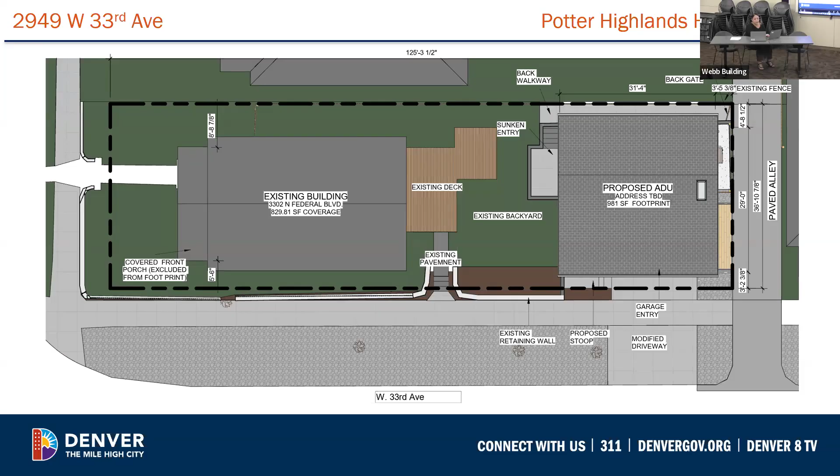You can see the south elevation facing on West 33rd Avenue with the main ADU entrance on the left. The structure will be clad in a blonde modular brick at the first floor with a 5-inch shake shingle siding at the second floor and a metal C-channel between the first and second floor for banding. The materials match those found on the primary structure, and materials like this are commonly seen in the district, meeting design guideline 4.20. And then windows at this elevation are just simple 1/1 double hung windows with proportions that match the district. Next slide.

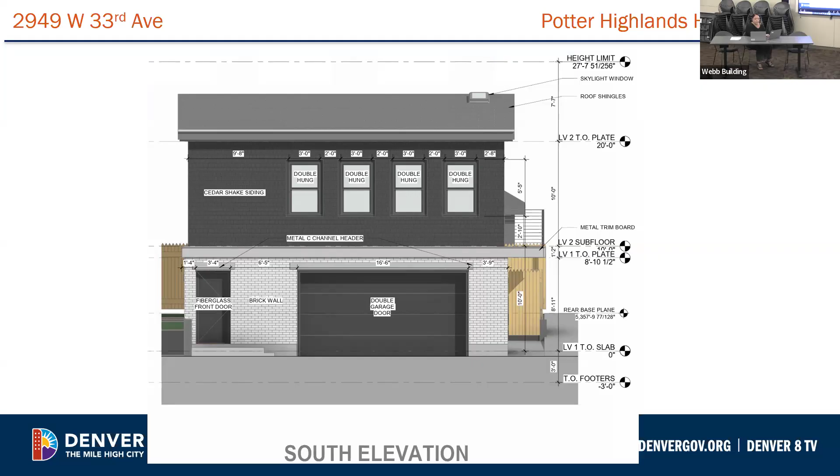So here you can see the west elevation facing towards the rear of the primary structure. As you can see, the grade does change from the street. At the first floor, you can see these two doors. One entrance is to the garage and the other is to the home gym. At the second floor, you can see more atypical clerestory windows mimicking the asymmetrical roof line, which is more visible in this facade. Next slide.

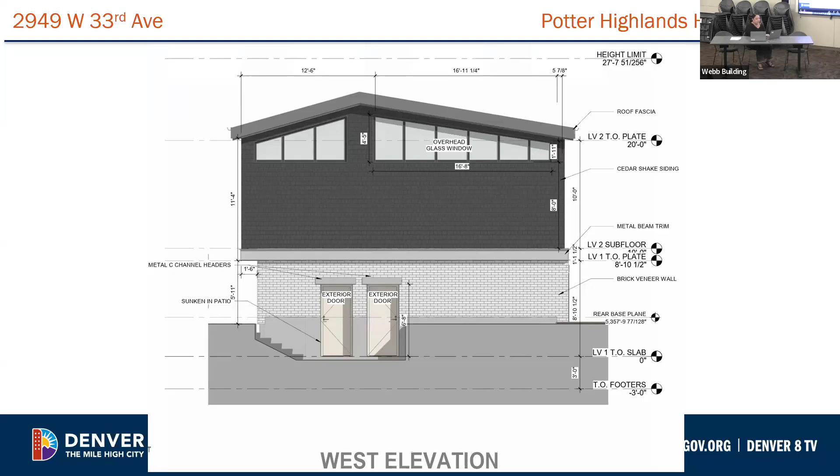Here's the north side interior elevation. This entire elevation will be clad in that 5-inch shake shingle with that metal C-channel trim showing the separation between the first and second floor. At the first floor are casement windows for the gym. At the second floor, simple 1/1 double hungs again that match windows at the alley and West 33rd elevations. Next slide.

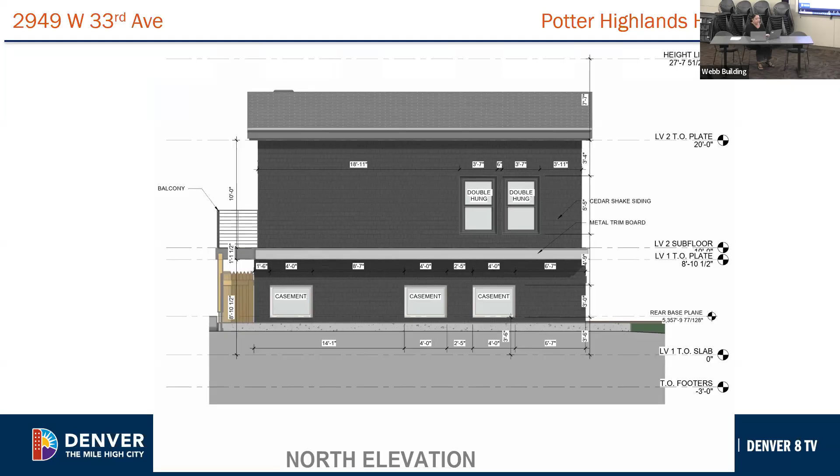And then here's the east elevation that's facing towards the alley. Here again is that blonde brick at the first floor and the shake shingle cladding at the second floor and double hung windows, as well as a small balcony with a horizontal metal rail. Here again, you can see that asymmetrical roof line as well. The garage ADU is compatible and subordinate with the primary structure in terms of height, mass, and form, though the roof shape is not found on other accessory structures in the surrounding context, but mostly meets design guideline 4.19. Next slide.

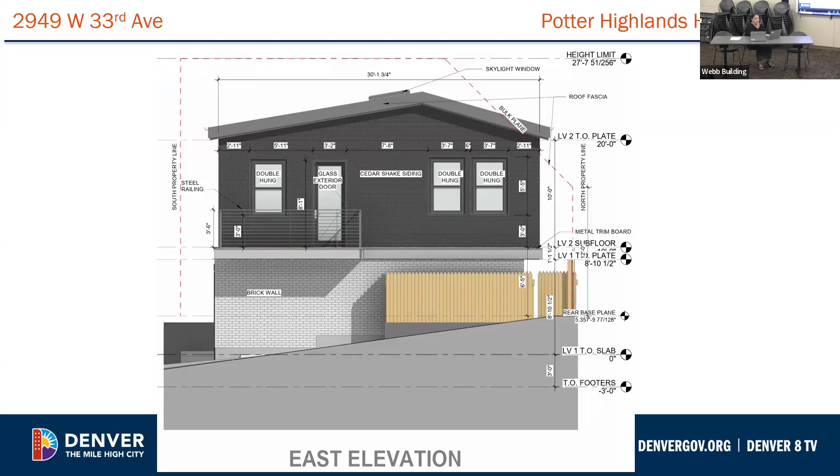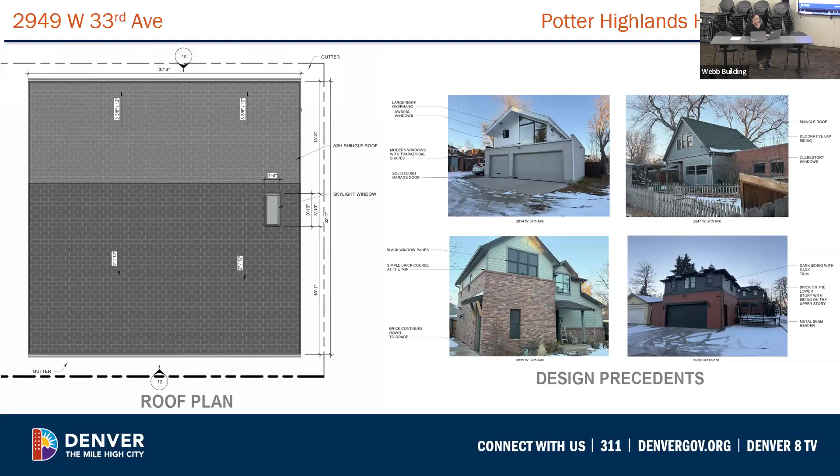And then here's the proposed roof plan for the new structure on the left. The applicants have proposed an asymmetrical roof form that's not commonly found in the district and does not relate to the surrounding historic context or to the primary structure on the lot. On the right here, you can see some of the newer ADU design precedents they've included in their application. However, as you can see, none of these have an asymmetrical roof form. Next slide.

The Denver zoning code states that the commission must find that development conforming to the requirements of the code would have an adverse impact upon the historic character of the district or the historic structure. Landmark staff is not supportive of the requested administrative adjustment for the bulk plane encroachment for the roof, as the overall design of the roof has remained asymmetrical and does not match roof styles typically found in the historic district. This garage ADU roof design does not match typical garage ADU structures that are found in the district, so meeting the requirements of the code would not have an adverse impact on the historic district in this case.

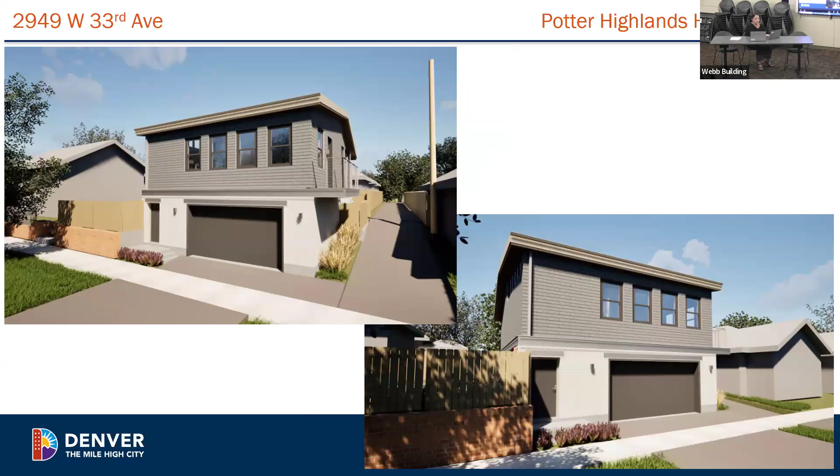Thank you, Crystal. Commissioners, do you have any questions for staff? I did have one question as far as in considering how this ADU fits into the surrounding context. It sounds like you're looking mostly at the primary structure, which I know is what we typically do, but because of this placement on the street and we have neighboring actual primary houses right next door, do you have a sense of how this ADU fits within the height and the setback? It looks like height and setback wise, mass and overall form does appear to fit.

It was really just the roof form, which I think if this was a primary structure, we might not be comfortable still recommending approval. But because it is a detached accessory structure that is of its time, we thought maybe the roof form would be okay because all the other guidelines have been met. But we wouldn't necessarily support an administrative adjustment for it. But it does seem to fit overall. All right, thank you, Crystal.

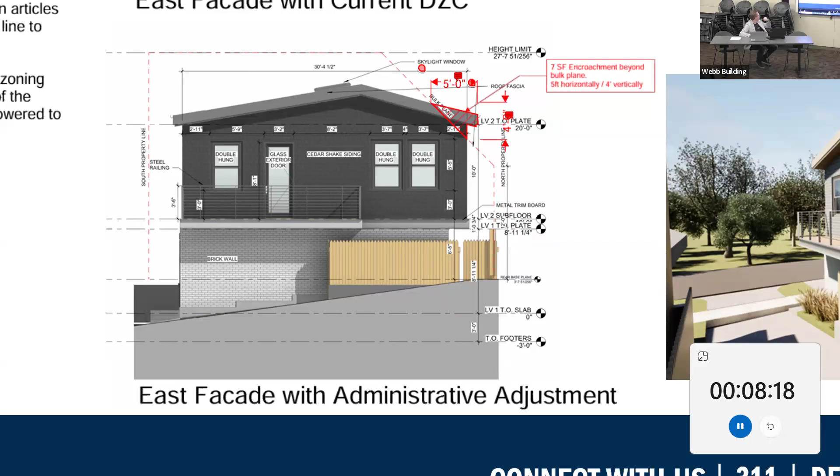And so we went back to the drawing board. I don't know if you could zoom out a little bit on that one. So we went back to this, and we had to make that slope because of the bulk plane, and it made for a kind of undesirable interior condition that was maybe like 5 feet or so high. That's where the bedrooms are. So it wasn't ideal, but it did work.

And so we went with that first, and then I think Crystal came up with the idea that we could actually make these the same height, which the client loved. And so we brought the roofs up to the same height, and that really made those bedrooms a lot better on that north side. But the part that we diverged a little bit on opinions was if we took this, it made it centered. And it seemed like a fairly easy thing to do.

We can do it if we need to, but the interior walls are right here and then right here. This is where the garage is, and we need that at least 20 feet to fit a parked car there. And then this is where the bedroom walls are. So everything stacks, and the center of the roof stacks on top of that. If we move it over, like I said, we can do it, but it'll either have a beam here, and then maybe have a beam in the garage space here, which will then interject with the stairs on the other side. I don't know if we could see a floor plan, if that's possible.

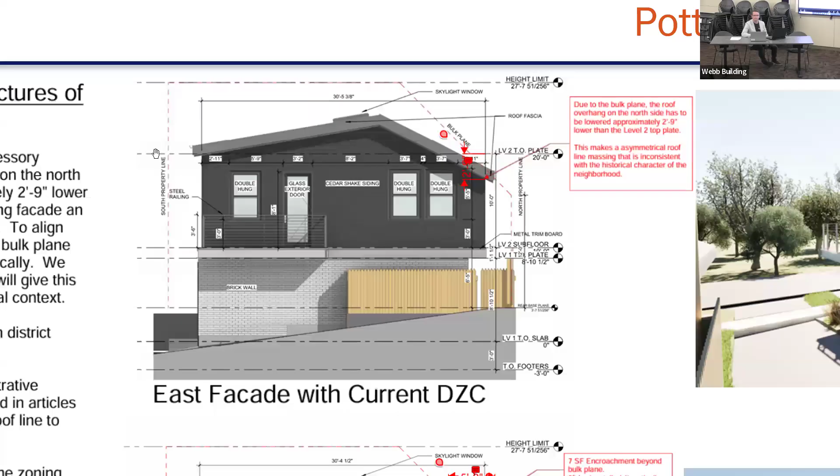And to better understand the comment you made about the asymmetrical roof, the peak of the roof, you didn't submit reflected ceiling plans, or at least they weren't in our packet. So I'm curious, are you proposing that the roof or ceiling area in the kitchen and living room are exposed and you're seeing that peak, or are there drop ceilings in any of the areas? Yeah, everything's vaulted in this one. And in the bedrooms and the bathroom as well?

The bathroom, no, but the bedrooms, yes. The closets are capped off too. Yeah. We actually plan to put a little mechanical room where that closet space is, maybe up there, because there is some added height. Since we changed the roof, we really could take advantage of a little bit of extra attic space there.

And the bathroom would look really weird if it had 10 or 11-foot ceilings, so we capped that off at 8. But everything else, like the bedroom and living room, they're all vaulted. That should make the space feel a lot bigger, even though it is a small area. Any other questions?

All right, I just thought, and maybe this is for Crystal too, today we're voting on whether it's approved through Landmark, but getting the recommendation of Landmark when we go for an administrative adjustment makes things a lot easier. I know, because I've done this on another project and it got through in one day. So getting your approval is really important to me. So if we have to change it, even if we get approved today, I just want to follow up with you and figure that out.

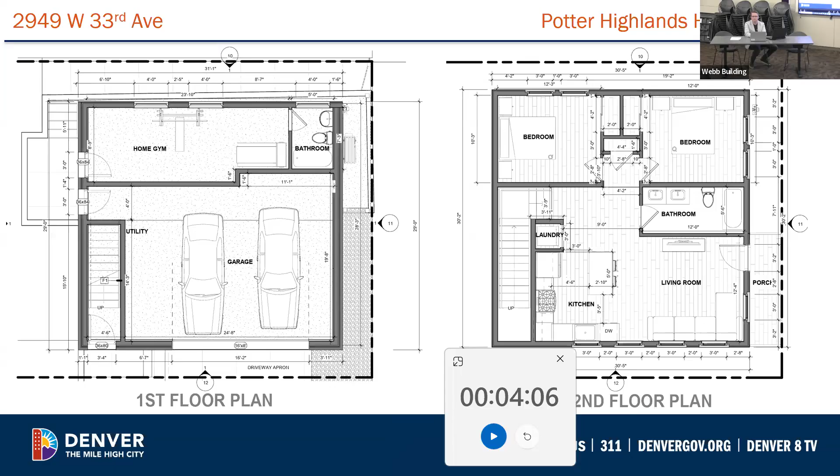I guess that brings up a question I have for you: would you prefer to get the administrative adjustment from us, which my understanding is would save you the time of going to the BOA for a separate process, if that meant making the roof symmetrical, which we'd have to deliberate on, versus holding on to the asymmetrical roof and pursuing the BOA process? Is that something we can take into consideration in our deliberation?

I know my client said they wanted to see if it would be allowed. I told them roughly what it might cost to put the beams in, and they said, let's try for that first. But it comes down to timing too, it can take a while to get through the BOA, so I think I need to discuss it with them. I know you can approve with conditions, so maybe, I don't know the best way, I'm just trying to brainstorm with you.

Besides sawtooth, did you consider any other roof forms? So this is our third roof form for this project, with different angles. Yeah, there were a couple more in concept, but my client gravitated towards the sawtooth first, and then we modified it.

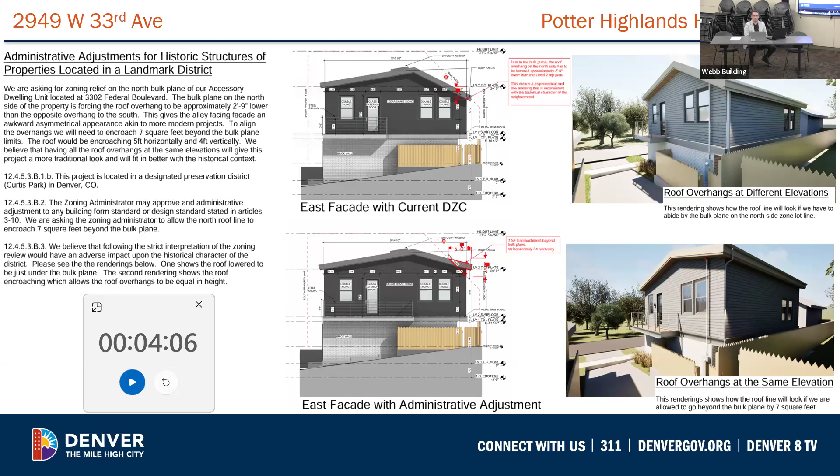I think we... Thank you. Thank you.

All right, staff, do you have any recap or clarifications? I just want to clarify, you're voting on this design, this is what they presented, and they're asking for an administrative adjustment for that bulk plane encroachment. And just to be clear, you have to find that they have to do that, because conforming to the requirements of the zoning code would have an adverse impact on the district or the historic structure on the lot, and you have to find that to give them that administrative adjustment.

If you don't think that, you shouldn't support the administrative adjustment, just to be clear. But you can approve the design as is, and they can pursue other options, or they can change it. In which case, it would likely have to come back, but if it's a simple roof change, it could likely be on consent, so.

All right, thank you. Okay, I think we're ready to move into deliberation. What are your thoughts, commissioners? So I'll jump in, because I asked that question, but my first thought is that I'm hesitant about the asymmetrical roof as designed, even just approving it, regardless of the question of the administrative adjustment, because it's facing 33rd and there is the alley there, and you would see from 33rd, across the alley from that ADU, I think pretty clearly that condition of asymmetry.

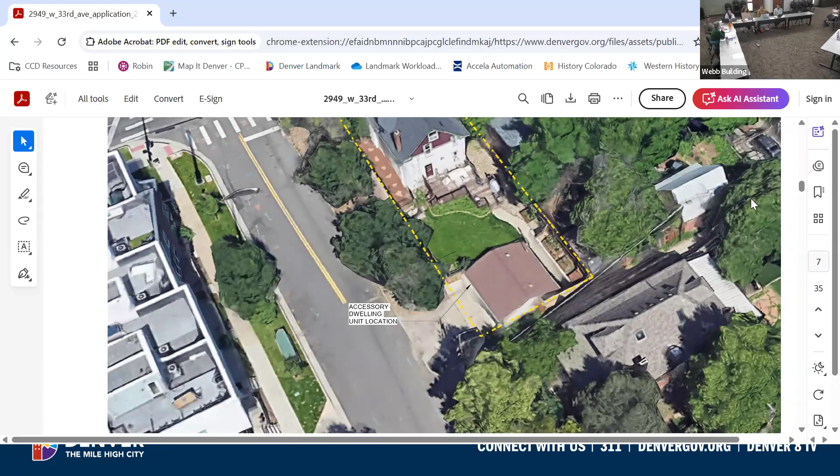Yeah, I think if they do the symmetrical, they'll probably hit the bulk plane regardless, right? So I'm sure they're gonna have an administrative adjustment at some point if we recommend a symmetrical roof configuration. But a wider consideration of options might help instead of trying to force that engineering in. Again, friendly comment. Because then, if it was a more traditional roof line, the administrative adjustment would be more straightforward.

Well, I guess in the interest of making sure we're moving forward, it sounds to me like it's possible that what we're actually getting at is a denial at this point, and asking the applicant to reconsider the roof entirely and see how that might better fit with design guidelines. However, if someone has a different motion that they'd like to make, we can certainly do that.

I would have. I probably would have been pretty close to approving with the administrative. So I don't know if that really makes any difference if we go and it doesn't pass, or we go denial and vote that way. I don't know what difference that would make one way or the other.

Yeah, I mean, I guess the issue is that we're at quorum. Yeah. And if we don't have a motion that can be approved by all of us, then basically they have to come back either with this application or with a different one. It doesn't really matter either way then. Yeah, I guess not. But I think we might need to do both motions. It depends on if we don't have a vote.

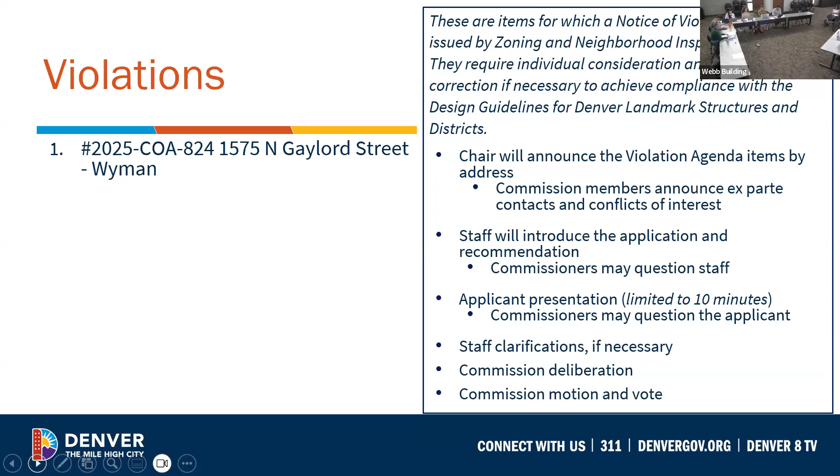All right, we now have the violation section of our agenda, with one project. This is application 2025-COA-824 at 1575 North Gaylord Street. These are items for which a notice of violation has been issued by zoning and neighborhood inspection services. Now that I've introduced this project, we'll hear from staff and then ask questions. Go ahead. Amy Amadon, representing Landmark staff. And we have Michelle Campbell, the applicant, here with us today.

So in 2022, the landmark inspector had reason to come to the site based on a complaint that there was some work occurring at the rear of the property, I believe some fencing under construction. My understanding is that at that time, 2022, Michelle was a new owner of the property. As I mentioned, this house was built in 1910. Decades ago, it was converted to a multifamily property.

And the landmark inspector found some fence construction underway, a notice of violation was issued, staff issued a certificate of appropriateness and a permit was pulled and Michelle legalized that fence construction. So everything was settled in 2022. At the time, from what I can see, the landmark inspector also thought perhaps there was a window violation, but nothing was resolved at that time.

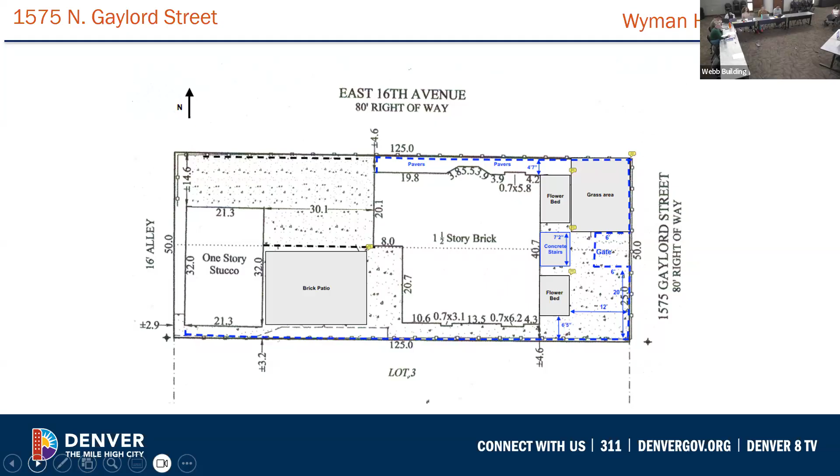So as you see in this site plan, I'll refer to this again in a moment, but I do want to call to your attention that there's quite a bit of hardscape here, that indication of concrete and a little bit of softscape in the front with some flower beds and grass. Next slide, please. So I know this is a bit of a fuzzy image, it's just a screenshot out of Michelle's application packet, but what I want you to see here, she's got some dimension lines indicated. It looks like the fence in the front of the property is about 48 inches, which is allowed. But it quickly at the side jumps to something taller.

And the design guidelines call for fencing to stay at that 48-inch height until you get to the front facade of the building, and then it can jump to 6 feet. So there's a concern with the guidelines that the height increase is too quick there, and you would have to find that that was acceptable in order to allow that fencing to stay. So that's just one thing I want to call to your attention as a potential conflict with the guidelines.

You'll also see in this picture, and you'll see it more clearly in another image, I guess go to the next slide, that there's an arbor in the front that is definitely over the height allowance for fencing in the front yard. Another thing to look at here is the amount of hardscape that has occurred in front of the property.

Sorry, I need to open a note here. ...myself out of my computer.

Okay, so the two aspects of the guidelines that we're finding in particular are not met have to do with the walkway and hardscape and the fencing. So initially I showed you a picture of the property in 2019. At that time, the walkway leading to the house was flush with the lawn. There were a couple of steps that led you over the little grade rise in the front, and then a sidewalk that led to the porch, and then you rose up on a grand staircase to the entry to the house. That has now changed.

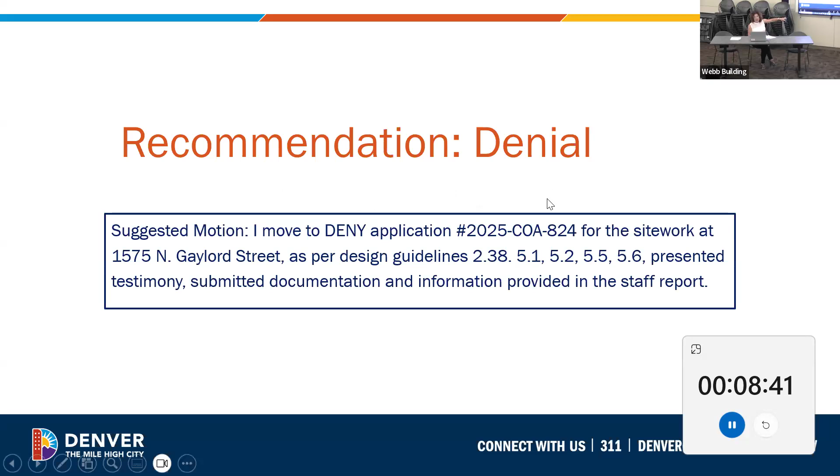That big set of hardscape in the front, I know we could go back to some of those other pictures, but that is used as a sidewalk area to get back to the rentals. If you look at the south side of the building, yeah, kind of there, you can see it a little bit. As you go past that bench there, you have to go downstairs to get to the garden level units that are down there. And so a portion of that front hardscape really has to be sidewalk to be safe to walk through for the tenants, so that you can shovel and keep it clean and everything like that.

So I think there's a portion in front of that where that little patio table was. I mean, something could be done there, I guess. I do not think it could be grass. I don't know how you would keep that grass alive. We don't have any sprinkler system or anything. The beautiful grass that you see on the northeast corner is actually turf that I put in because the tenants' dogs had completely killed that grass. So I put in a really high quality turf to keep it green and beautiful and have a place for the dogs to go. But I can't keep grass alive there. So if you wanna talk about other options for that hardscape to make it prettier, I'm open to things, but I don't think grass will make sense.

As far as the fence goes, if we go to the presentation I put in, when I had my first discussions with Amy a year ago, she did mention the cheapest option is you can take down the fence because you don't need a fence. And I really think, looking at this first slide, this building is 1 block north of Colfax and 1 block west of York. It's not in a great area. There's a synagogue across the street that has a food kitchen every Wednesday. We have homeless encampments regularly in the area.

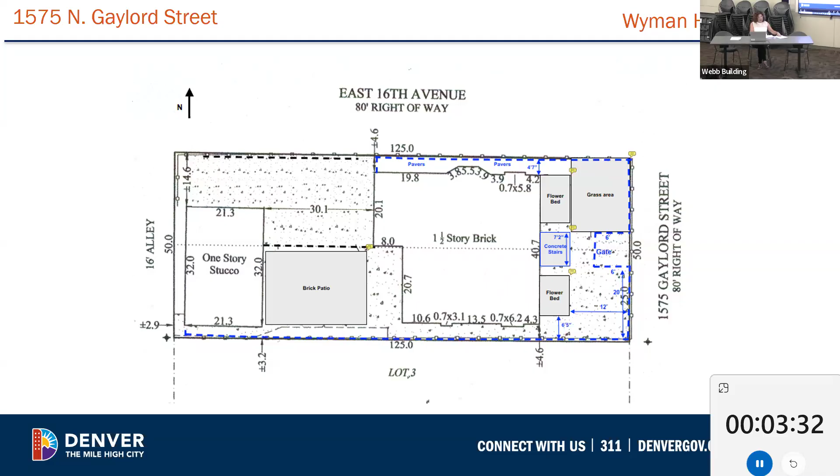On the south side where the fence is a little tall in the front, that's because the neighbor's property goes like this and the fence is built on theirs. So I think she was trying to back one side. Yeah, it gets to be 4 feet further on. I think she was trying to just layer it up. I don't have a strong opinion about that either, except that there are a lot of big trucks that park on the other side of that fence. You can see in one of the pictures I provided a bunch of big trucks parked there. There's a current day picture of the south side of the house. I don't have that in the PowerPoint, but it's in the PowerPoint that Amy showed. That's all I have. That's the end of my presentation.

Thank you. Commissioners, do you have any questions for the applicant? I just want one clarification. So when you bought the property, the fence was already up? Yes, in its entirety, except for the backyard where I did work on the fence. And I did put in a second door that matches the doors in the front, and that was approved by Landmark at the time. It has the same construction with the black iron and the bar and the metal. So you added some additional fence in the back? Yes, to contain the entire yard, for safety and to allow another entrance in the back for people coming from the north side. Thank you. Any other questions for the applicant?

It might actually be for staff, but I think that is an important point. So Landmark did approve that work in the back with that construction material? No, it's a different fence material in the back. No, there's a wooden fence, but the door is the same construction material as the one in the front with the rebar and the black iron and the metal grating. It was built by the same person. So I used the person who had worked for the previous owner.

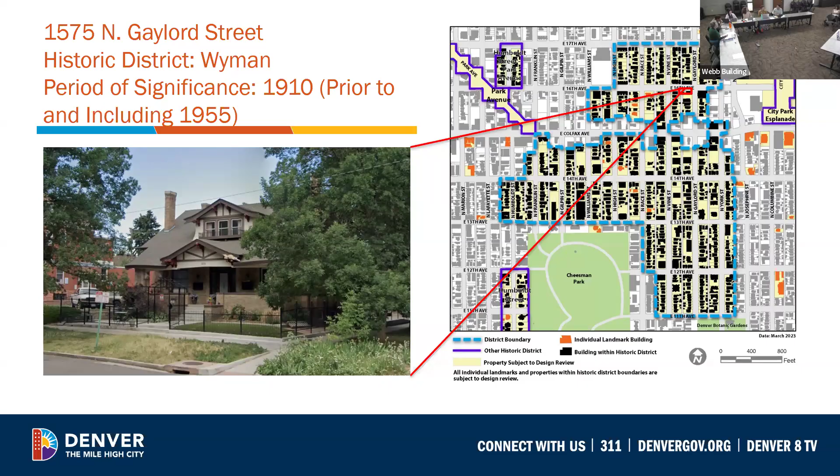So I think to your point, Chris, that'll get worked out in the conversation between the applicant and their landmark staff person. Right, I'm glad to hear Amy say that there's maybe a solution. That's all I really wanted to hear. I just didn't want to stick the homeowner with, hey, this doesn't follow the guidelines, you're gonna have to either completely redo it or tear it down. There's gotta be some kind of middle ground, I think.

I do think staff does work with homeowners. I think the homeowner in this instance wanted to see if this as installed could be approved by the commission. This could become a staff level approval if we could find something that was at the guidelines, and we all agreed on it. All right, would someone like to make a motion?

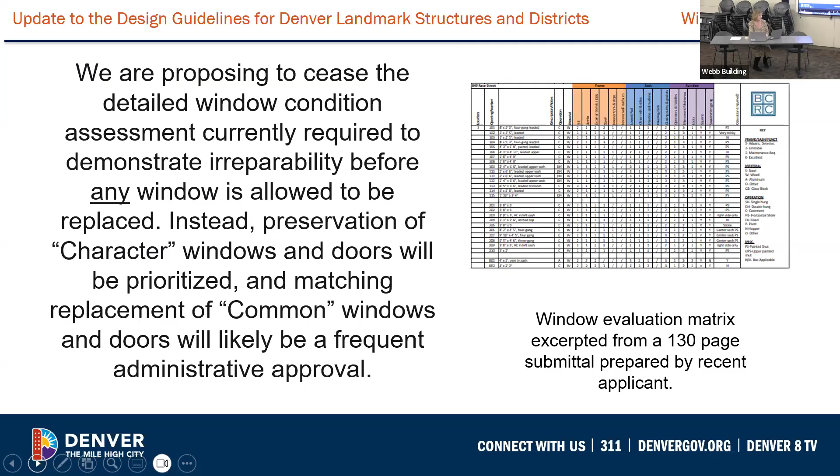Moving on to more of a design discussion. What about whether people can add new fenestration or infill or alter fenestration on a historic structure? So right now, I would say we don't really have very good guidelines for this. There's only one guideline that talks about this in terms of windows and one that talks about this in terms of doors. So I think designers probably feel it's pretty murky whether they can do this or not on the historic part of the structure.

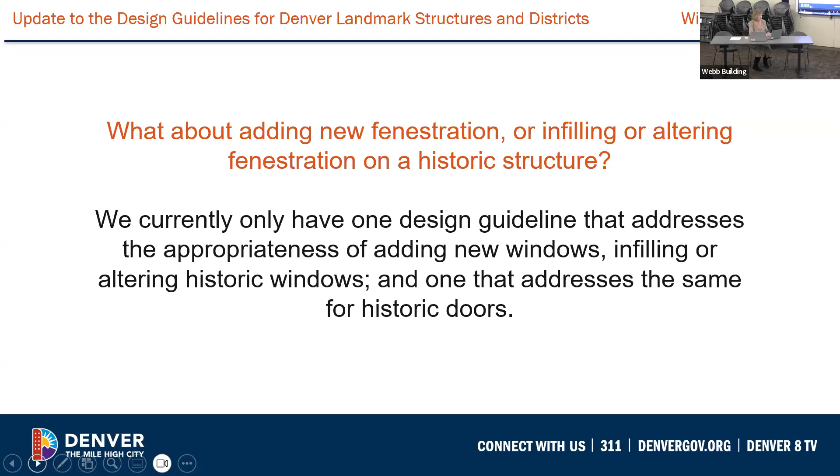So to improve that situation, the first thing we are doing is, sorry, I'm not even telling you when to advance the slide. Thank you for being

psychic. We are improving our definitions about visibility and public vantage points. Right now, we talk about caring the most about things that are on, what's the term we use, Brittany? Primary facades. And that is the street facing facade, which is pretty obvious what that means. Now we're gonna talk about public vantage points, which is defined here, and it means something broader. If someone's standing in front of a building, that might mean you're getting some views down the side. So it is expanding the area that you're going to be more restrictive about.

So that means, in your question of are we getting more strict? Yes, because you're gonna maybe be putting your foot down a little bit more about a broader view of the front of the building. You're also being more clear about what you care about. So as I go on to the next few guidelines, just keep in mind that we are adding some better definitions to where the hard line is for various policies.

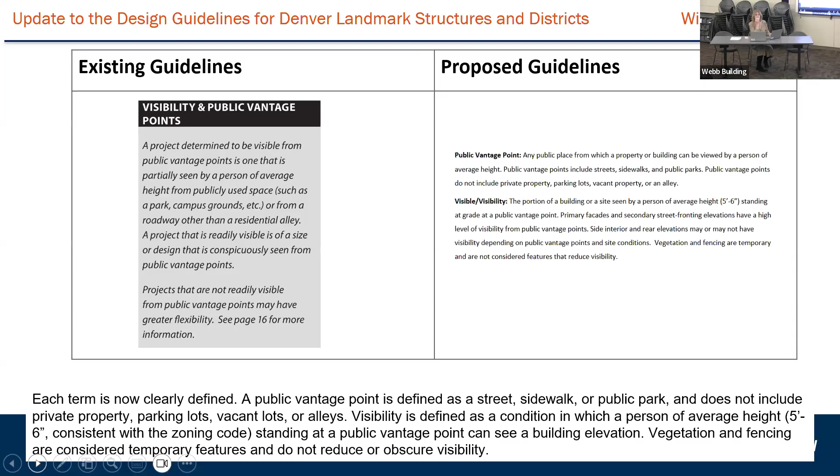This wasn't in the glossary before, and these terms were interchangeable in the guidelines before, so we've given them a clear definition and also aligned them with the zoning code definition of 5'6" height. So if you're 5'6" and you are standing at a certain point and can see something, that will be public visibility. So it has to be a street, sidewalk, public park. You can't be on private property, you can't be in the alley, because you all often ask about that, particularly the alley. So we wanted to clarify that.

And you can't be across the street in a third floor window. We're really trying to make it more clear what the threshold is for features that need to be protected. Okay, so putting a side to side comparison for a couple of guidelines here. In terms of what fenestration can't be disturbed, you have on the left an existing guideline, maintain pattern and proportion of existing openings, and then next to it is the comparable proposed new guideline. They're the same in the sense that they both prioritize maintaining fenestration and integrity where it has the greatest public benefit.

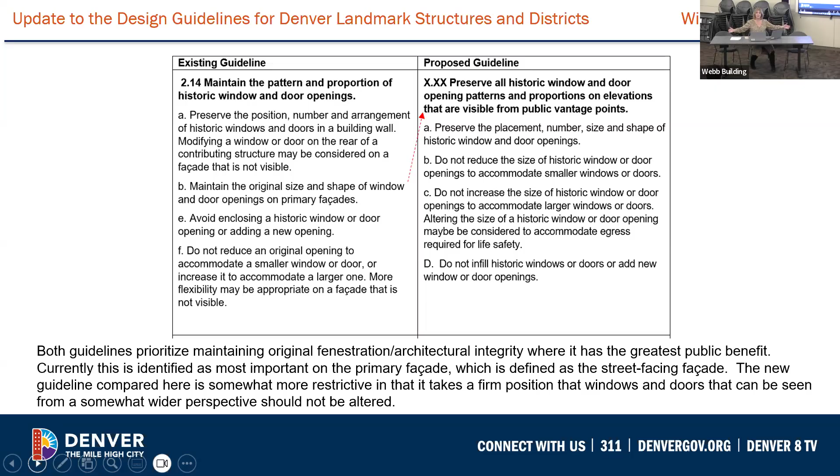Currently, this is described on that primary facade, that street-facing facade, and in the new guideline, it's that public vantage point I just described. So the new guideline is more restrictive because it's potentially a broader area. Now we're wrapping down the side of the building. Next slide, please.

However, in the current guidelines, it gets murky what happens in the sides and the rear of the building. It kind of waffles about whether you can or can't change openings on the side and the rear. In the new guidelines, I think it's clearer because it talks about character windows on the sides and rear. You probably can't alter those because those windows are going to be protected on all facades. Common windows, you probably are going to be able to alter. And we talk more specifically about you can lower a sill, you can make it wider.

You need to keep some perspective. You can't change every opening on every facade. There's some threshold about the majority and there are some boundaries, but right now we don't say anything. We make it like, well, maybe why don't you spend $10,000 designing for your client and we'll let you know. So I think we are doing a better job of setting some boundaries without making it so firm that there's no flexibility. Next slide, please.

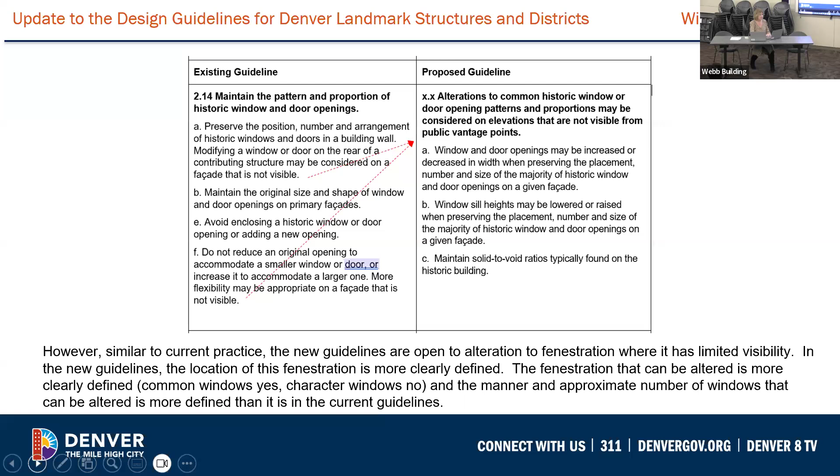Right now, the guidelines don't say anything about whether you can add a new window to a historic structure, which is kind of crazy. That's a gaping hole, I think, in what direction we're giving to applicants and to ourselves. And it only has one sentence about whether you can add a door to a historic structure. So we have a new proposed guideline that at least says something about that, which says you can do those things if it can't be seen from a public vantage point.

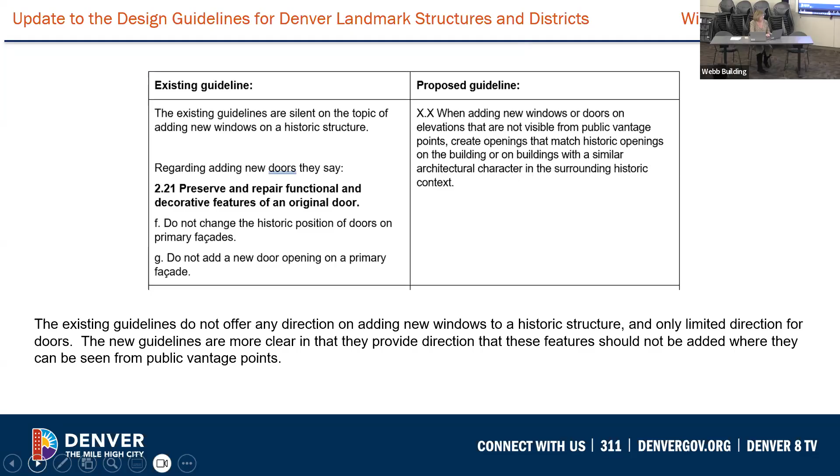Next slide, please. So that's kind of what we have to say at the moment to you about whether we're being more restrictive on windows in historic structures. Do you have any questions about that so far?

Okay. And then the other topic, which I think we weren't really expecting you to be concerned with, but it definitely came up in the September 2nd meeting. I'm just gonna be a little brief about it. I think Nick was particularly the advocate, he's not here. And Chris, you had some interest in it. And the question was, why aren't we adding vinyl as an allowable window material for a historic structure?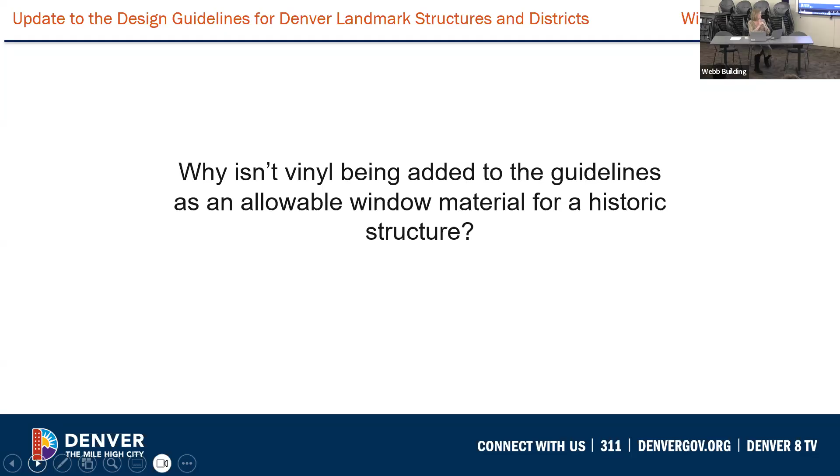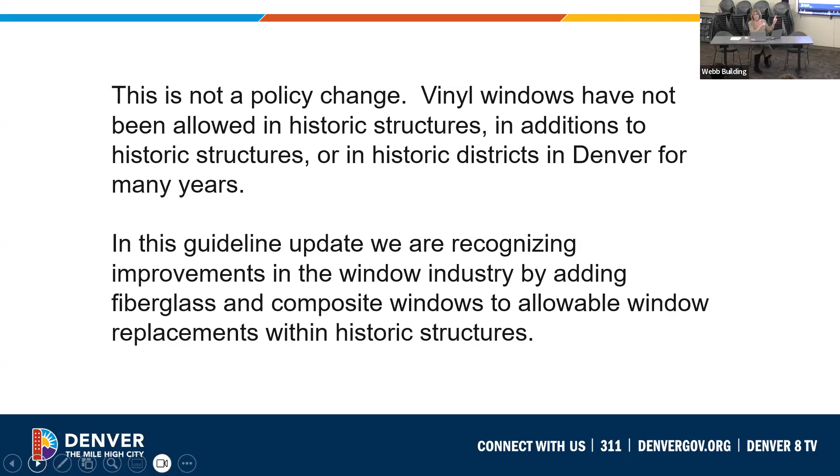So next slide, please. And again, sorry, there's no pictures. This is not a policy change. We've never allowed this in historic structures, in additions to historic structures in historic districts. In this guideline update, we are recognizing that window technology has changed. We are adding fiberglass and composite to the window types that can be inserted in these buildings. We haven't in the past. That's been allowed in additions and infill. We're adding it in historic structures.

Next slide, please. Some of the reasons we are not adding vinyl for any instance in the kinds of properties you regulate are, you know, the vinyl windows, I think, are something that are readily available, kind of off the shelf, and there's, in our perception, a wide variety of quality that maybe isn't so true of other window types.

They are something you can go into a big box store and get, you know, potentially a much lower quality version of that is more subject to these characteristics I've bullet pointed here than is necessarily true of some of the other window types. And we are concerned about opening the door to that. Less so concerned about that being true of fiberglass, composite, wood, aluminum clad.

I don't believe that vinyl is an allowed material in most any other historic district, historic commission around the country, and we don't want to be the ones to be the test case for that, so we are not inclined to add that. Do you have any questions about that?

Okay, last slide, please. So our next step is that we are bringing you a big package on January 6th. Hopefully we don't have a lot of cases that day. This is going to be a cleanup of chapter 1, which is the introduction chapter to the guidelines. The new guidelines for windows and doors, which is partly what I was just discussing, and a reformat for the whole guidelines chapter, which Brittany's going to show you, I think, a sample in a moment.

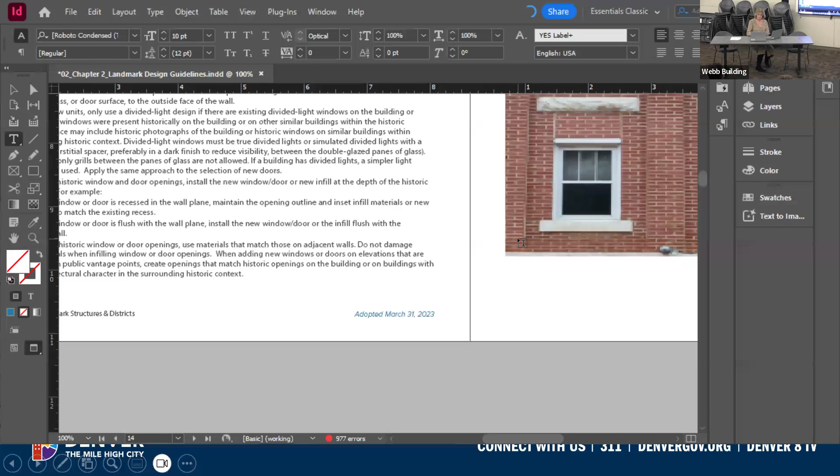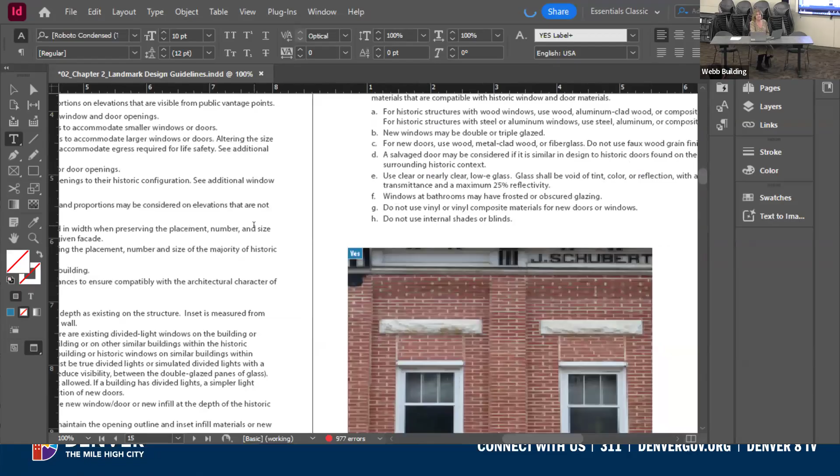I was gonna print these out, but InDesign conspired against me and decided to delete these pages, so that was cool. Oh God. And by cool, I mean, I cried a little bit. Yeah. So I recreated them this morning. Yeah, we have lost some software access lately and just a few traumas.

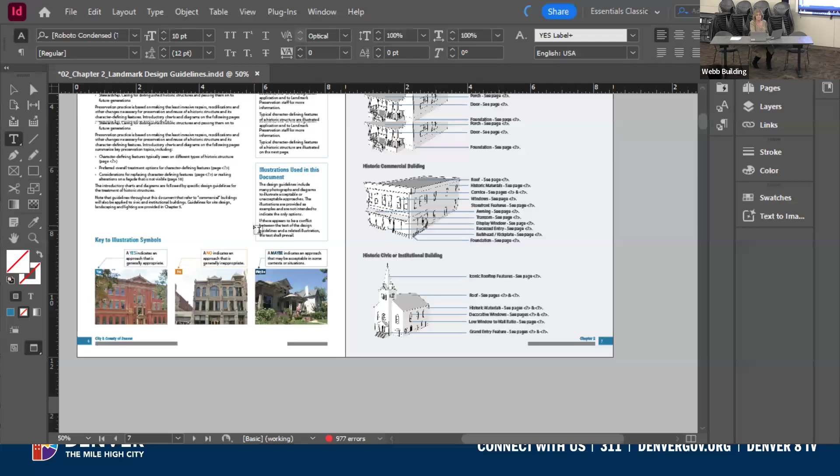Thanks, Brittany. So I know we haven't talked a lot about what the new design will look like, but this is a sample of chapter 2. So the new document will have new colors, as you can see here. It is blue. And the chapter 2 is still the historic building chapter.

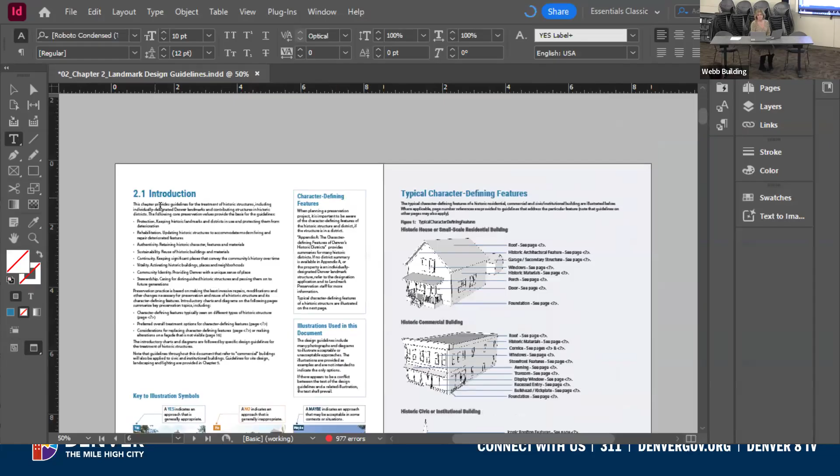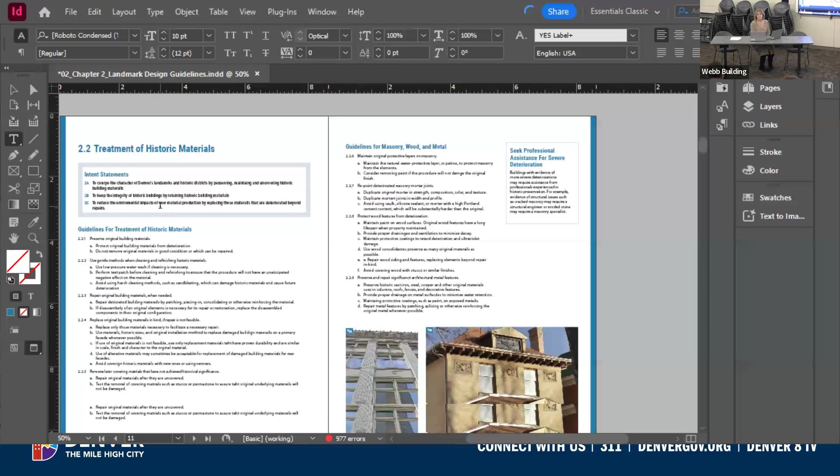And each section will be like 2.1, so intro chapter, the intro will be 2.1. And it will have a new numbering system as a way of wayfinding. And so the Windows section will all be 2.4. So all the guidelines for the Windows sections will be 2.4 guidelines.

So the treatment for windows and doors will be 2.4, and then you'll have the intent statements here at the very top, as opposed to the side as they were previously. So they won't get as lost as they were before. And then guidelines for openings will be there at the very beginning.

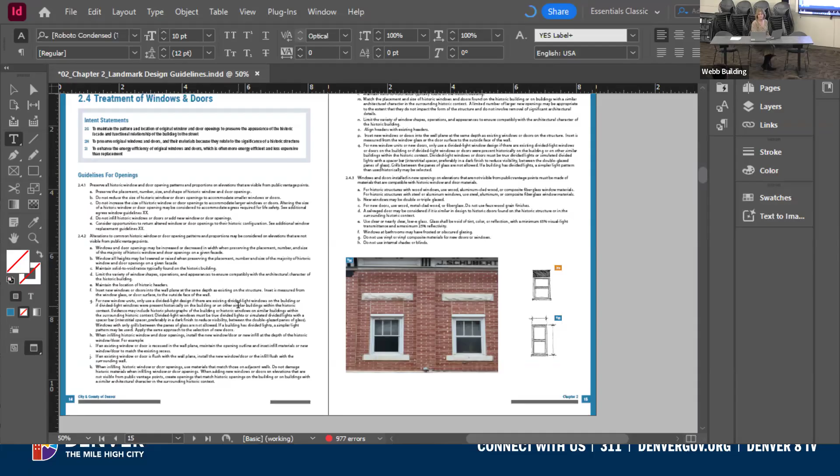So that's the section that Amy was talking about before, where we only had one guideline before about openings, and we have just a few more now. So that is 3 more guidelines there, just to provide some clarity about introducing new openings on historic buildings. And then guidelines for character windows, which is a new concept that we will be introducing to preserve those more significant character windows that we've been talking about this entire time.

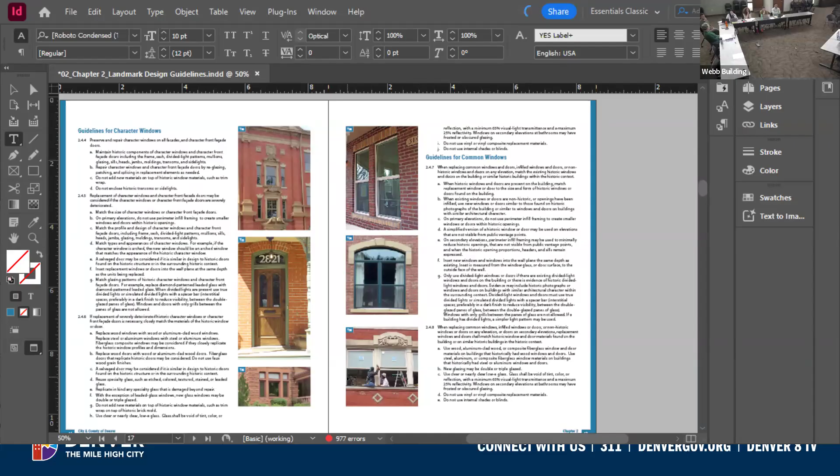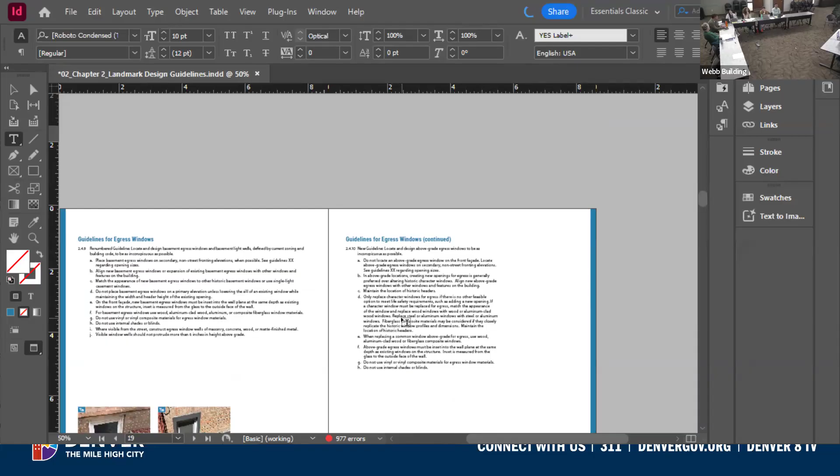And then some more flexibility to replace these more common windows, which are like simple 1/1 windows, eliminating the need for that assessment and making it easier to replace those common windows. Putting egress windows at the end of this section, because currently in our guidelines the egress window section just falls right in the middle for some reason and interrupts the guidelines for window replacement. So they'll come right at the end, and then 2 guidelines there just to provide some general guidance.

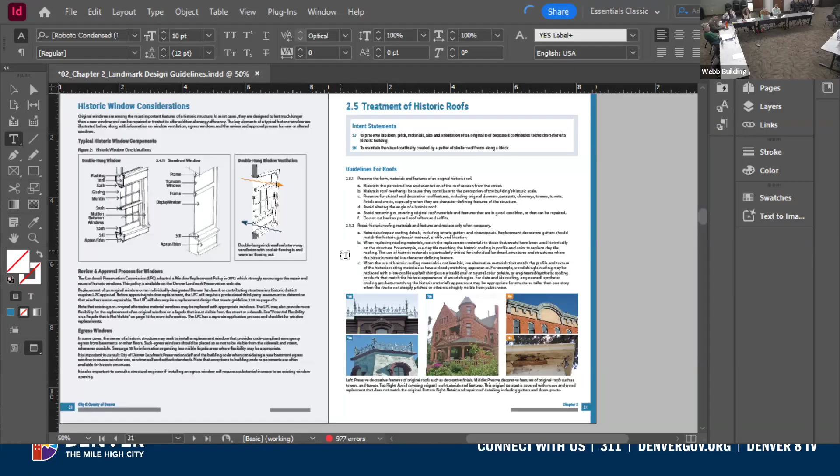And then I've mentioned a few times some blue pages that we have been working on. So this is one of our current guideline pages that has been converted into a blue page, but we'll have a blue page for what a character window is versus the common windows, to provide additional guidance to users of this document. I was planning on printing this out so you'd have it to compare with our current guidelines, but InDesign wasn't playing nice with me due to, I think, our license issues.

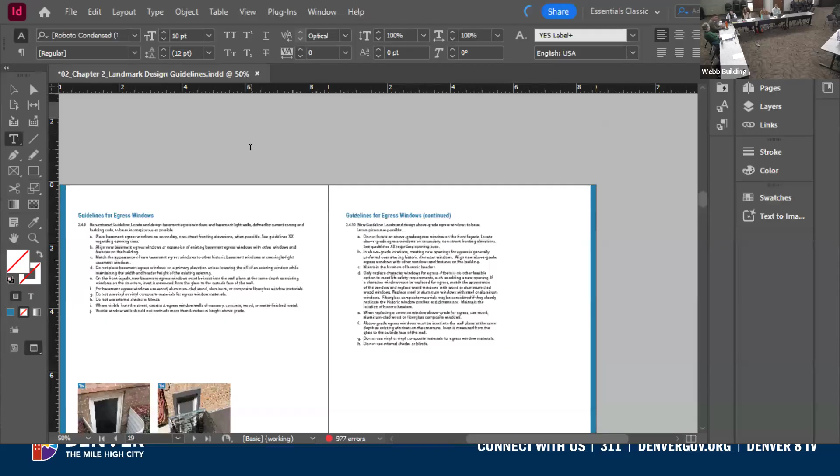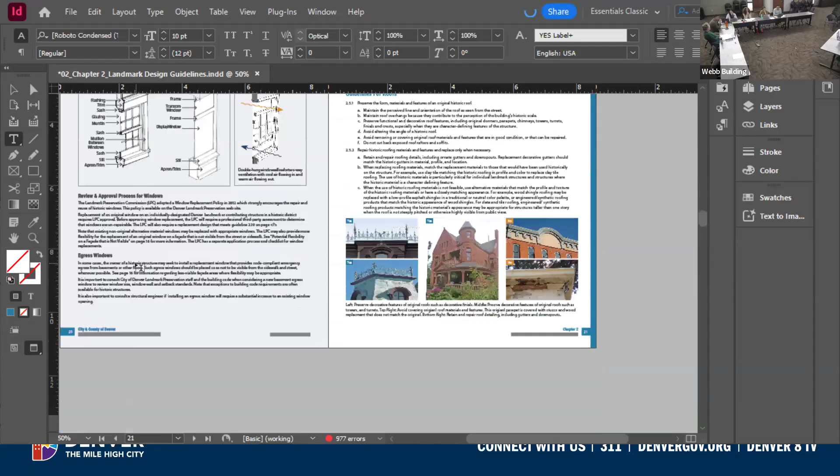But again, all the windows guidelines will be 2.4. So if you're ever looking for windows and doors guidelines, all you have to do is flip to the 2.4 section. You'll find everything you need there. There'll be blue pages in this section that we can pull out and hand out to people. So instead of this historic windows considerations page, we're going to turn it into a blue page for what a common and character window are, some information about storm windows and why you want to preserve your windows, and educational information.

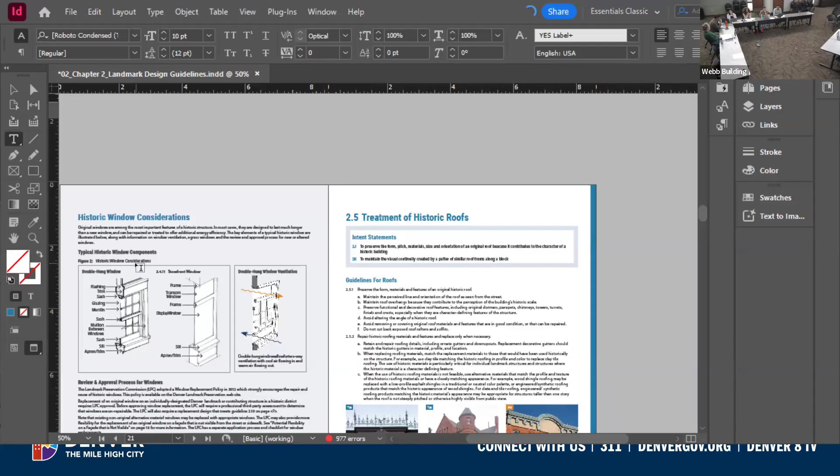Anyway, that is really what the layout is looking like. I know we haven't spent a lot of time talking about it, but that is what Andrew and I will be doing over the next month. This is just in general what the document is looking like, and that is why we are doing this in January, so we can do this layout for you guys. I like the idea of the tear out sheets. Yeah, symbolically or otherwise.

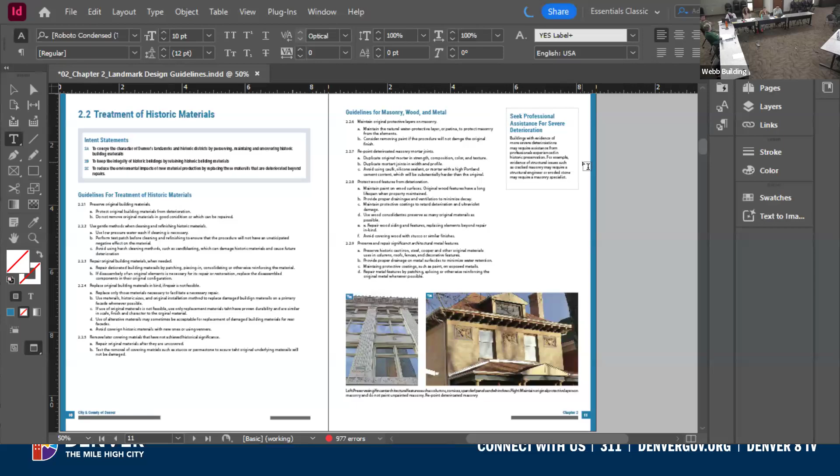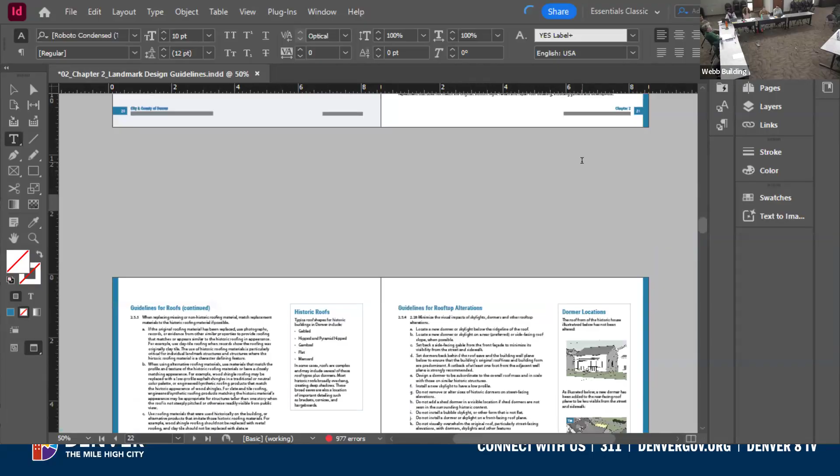A lot of this is just taking the existing guideline document and putting it in this new format that we've had since, I can't read the date because it's on my very small screen, but like 2023. We just haven't had time to convert it over, but I really want to make an effort to get this adopted, because it is an improvement for us. There are a lot of behind the scenes things. In addition to the visuals, it is ADA accessible, readable in a way that our current one is not.

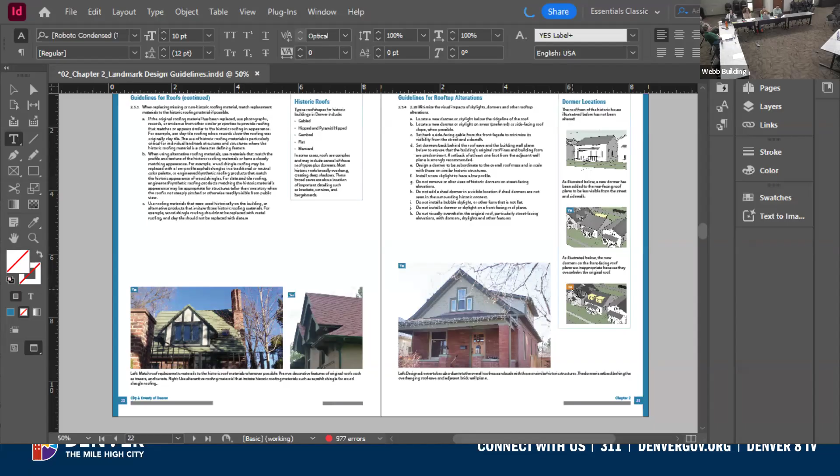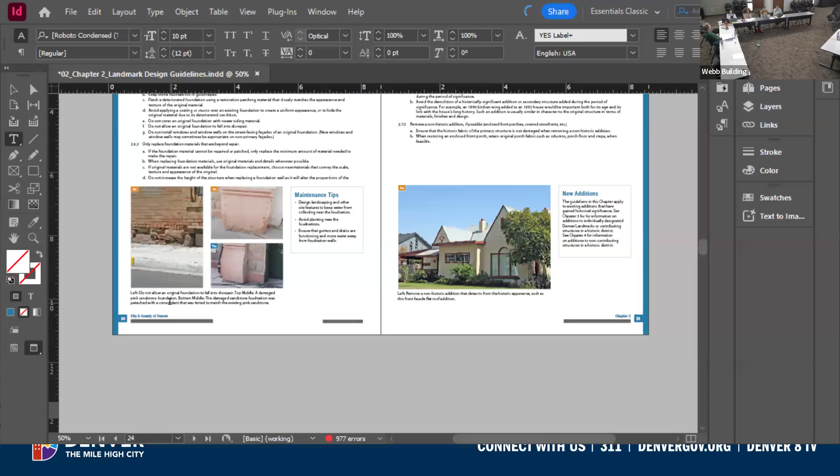And in addition, if you look at the photographs, it's really hard to see because it's very small, but the photographs are color coordinated. So if it is something we're encouraging, it's indicated in a blue box with yes. And if we're saying you shouldn't do that, it's no and orange. So there are very subtle coordinated things about this document intended to help with cues like, no, you shouldn't do that. Here you can tell that one's orange, so that's a no. So I think it will be much more user friendly, give more prominence to our intent statements than before, and really just be better.

I like, and I know we're not prolonging this, sorry, but the idea of explaining, like having some of the why in the boxes, because of course you can't integrate it into the guidelines, but there is so much mystery behind that for a lot of people. Yeah. So thank you.

And then eventually, Andrew is really great at illustrations. We'd love to update some of the illustrations, pictures and things like that. And it'll be a lot easier to update this document than it was our old one, which was kind of clunky and cumbersome. And once we get this updated, it'll be easier to update small pieces of it.

So for the review meeting targeted for the 6th of January, we would have this document and we'd have a week to review it, so it'd be the same as whatever's on the agenda, versus, I guess, is there opportunity to get our hands on it sooner depending on the page length so we can really spend time with it?

So we have to officially publish a draft with the clerk and recorder 20 days prior to the public hearing. So if we're doing the public hearing the first meeting in January, that is December 17th-ish. We could send it to the commission that same day, and you could start giving us feedback and comments then. Yeah, great, especially with the holiday, because I was like, a week, yeah, I will prioritize it, but.

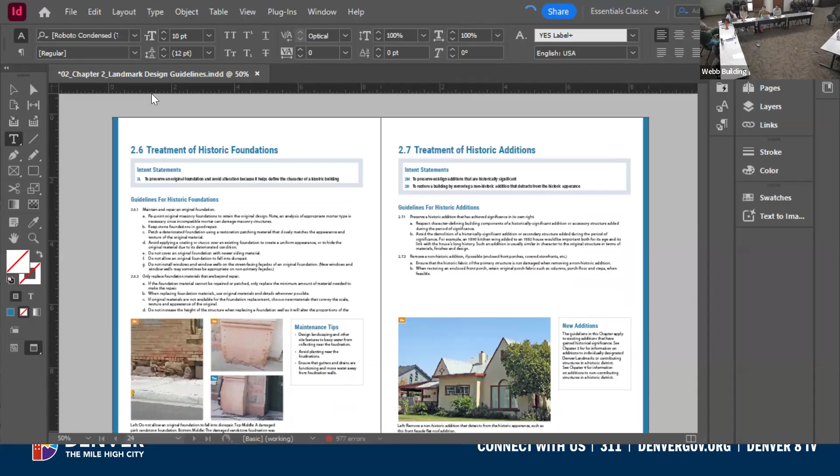A question about the timeline, this is Jen Capetto from Landmark staff, for the recording. The document has to be filed with the clerk and recorder, you said, on the 17th or 18th or something like that, and then that would mean that the commission would have a few weeks, but that's prime holiday time. Is that okay with you all? Do you want us to postpone it to the second January meeting? I'm just thinking along the lines of my schedule as well.

Can you make any changes within that period? If there were any significant changes between December 17th and January 6th, could you even incorporate that because it's been submitted? I mean, it's still just a draft document, correct? Right, yeah. It's just a matter of whether what you all would be reviewing would be what goes to the clerk and recorder, and then you all have to make a motion on that. It could be lots of conditions, it could be a denial, it could be approval. We'd love for it just to be a clean approval, ideally.

But really, the only thing that would be different is chapter 2, the windows and doors guidelines, and chapter 1. Right. Which you have had that draft document for several months. And again, if you have comments on photos and stuff like that, I'm open to those, but we're not changing any other guidelines at this point.

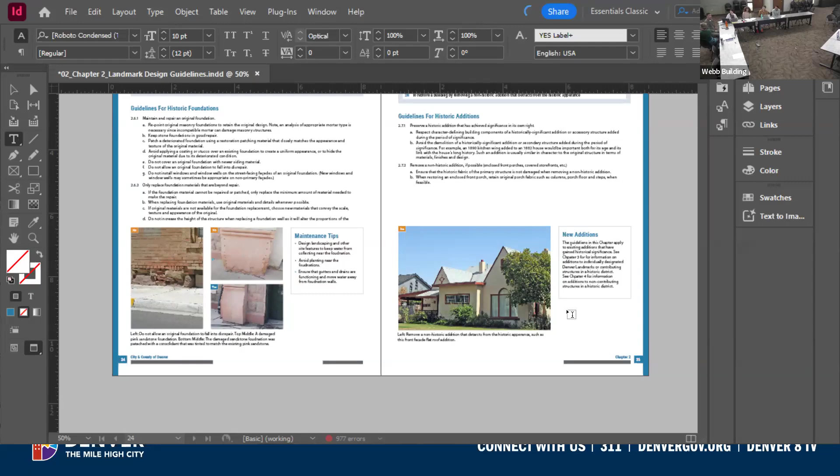Hi, Adam Hernandez, Assistant City Attorney. Just to put an overarching framework on this, the way these are adopted is through the city's rulemaking process. That's where Brittany's talking about posting a copy of the rules with the clerk and then at least 20 days between that date and holding a public hearing. It could obviously be longer than that. The other thing to consider is there would be a public hearing held for these rules. You may get a lot of public comments that have to be addressed at a later meeting.

So timelines are potentially in flux here. You would not be required to adopt this the date of the public hearing, depending on what you hear from the public. The public hearing would be held on one day, but then there could be subsequent discussions about what you heard and requests to change those design guidelines that would ultimately come back to the commission for their approval. If that makes sense, I feel like I was rambling a bit.

Is there a notice period before adoption or just for the public meeting? Just for the public meeting, and then a notice after adoption. But you could take longer from the date of the public hearing to your ultimate adoption. That does not have to be done the same day. Gives some flexibility at least. I think generally, we don't want to push any deadlines you've set. We want to work within them, but the sooner we can receive the document to review it and get any comments out there, the better. Understood you're not rewriting the entire thing.

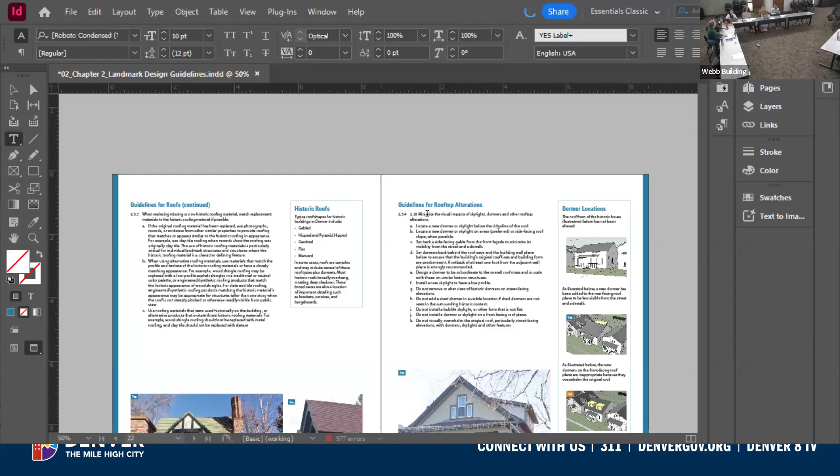Okay, so we will discuss amongst ourselves whether we could get you a version with illustrations in November so you could preview it and give us last comments. Otherwise, December 17th-ish, when we publish, you might get that. January 6th, we'll be here with a public hearing. Sounds good. I do know some of the pictures are not Denver. So if you see any that are not Denver, please let me know, although I think Jen and I did a really good job of scrubbing those.

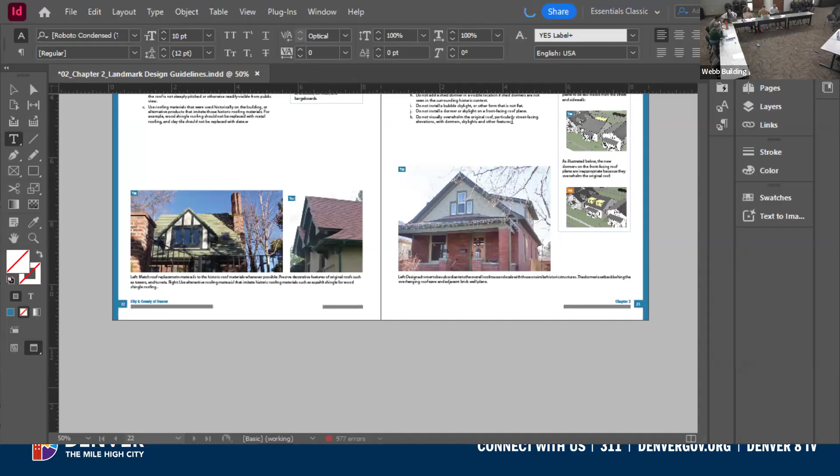Thank you. I really appreciate the summary and clarification of change versus no change. That was really great. And adopting the composite and fiberglass, I think that sets aside some concern about evolving materials.